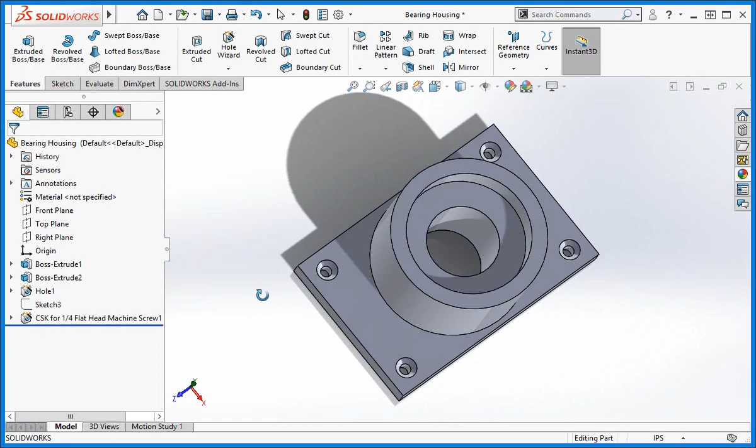Now you're going to create this bearing housing using the skills you've learned so far, and you'll get an introduction to the hole wizard. Start by creating a part file and then create this sketch on the top plane. The rectangle is a center point rectangle, and both the rectangle and the circle are coincident with the origin of the sketch. Also notice that the sketch is fully defined.

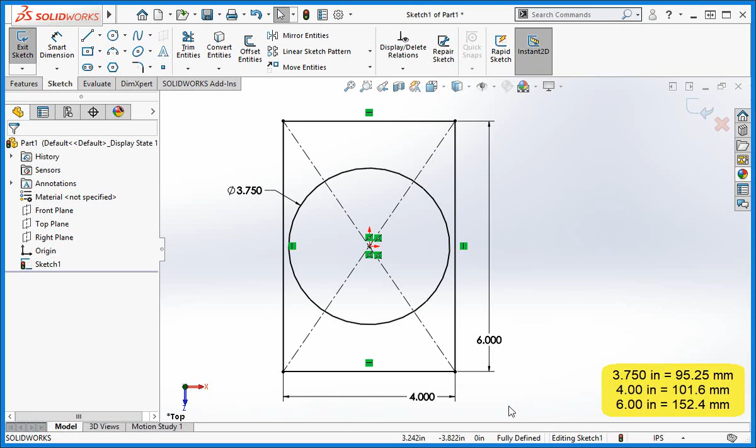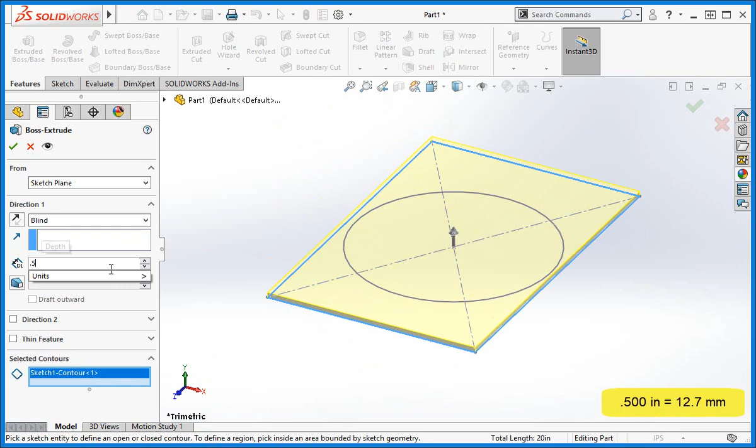Once you've drawn the sketch, exit it, and then open the extrude command. Select just the rectangle, and then set the length of the extrusion to 1/2 inch. Once you've created the extrusion, unhide the sketch.

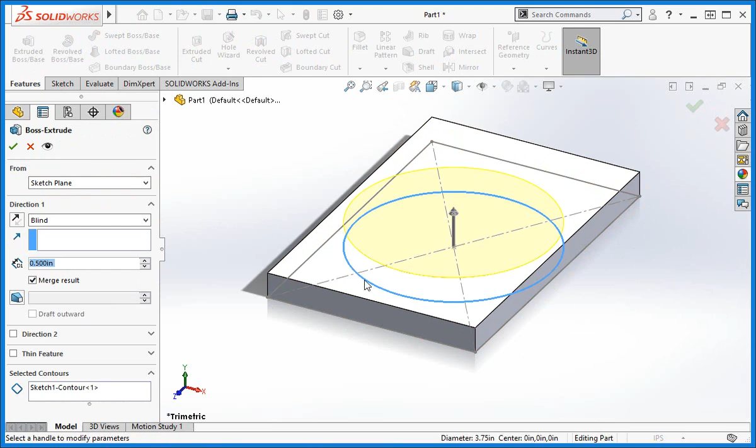Click the extrude command, and then click the circle to select the sketch. Set the length of the extrusion to 3 inches, and then apply the operation. Once you've done that, hide the sketch.

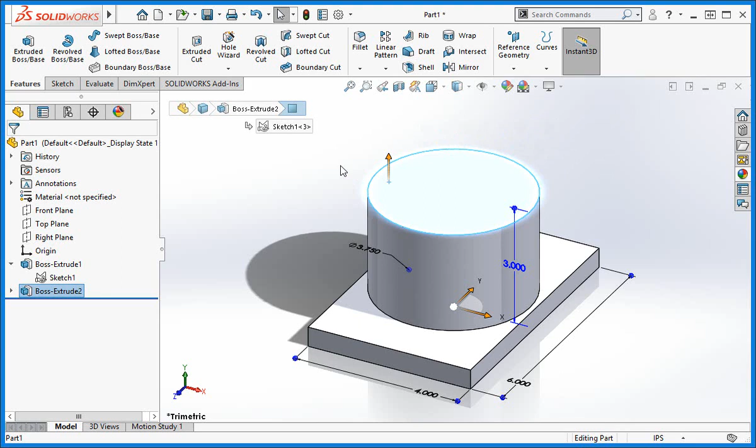Now we're going to use the hole wizard to create the counterbore hole in the center of the part. If you recall, in one of the lessons on the shell command, we selected the top of the bottle before we opened the shell command. When you use the hole wizard, the command will perform differently if you do this. I'll explain why this is the case later in the course. Go ahead and open the hole wizard.

With these options, you can create counterbore, countersink, drilled, drilled and tapped, and pipe threads. These options are designed to fit bolts and screws. This option allows you to create custom holes that don't necessarily fit a bolt or a screw. And the last 3 options create different types of slots. Select the custom option, and then set the type to counterbored and drilled.

If you scroll down, you can see a drawing that describes the parameters of the hole. The diameter is the drilled through hole. Double-click the cell to set this parameter to 1 3/4 inches. The next parameter is the depth of the hole, but since we're going to create a through hole, there's no need to enter a value.

Set the counterbore diameter to 3 inches, and the depth of the counterbore to 3/4 inch. Scroll to the bottom and then select the through all end condition. Now that we've defined the parameters for the hole, we need to specify its location.

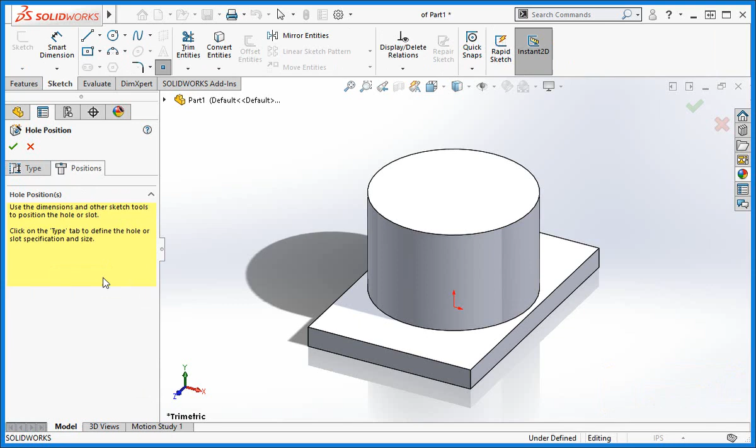Click the Positions tab, click 3D Sketch, and then place your pointer over the circle on the end of the second extrusion. When the center of the circle appears, click it to place the start point of the hole. You can add other start points to the part, but there's no need to do this at this time. Type the Enter key to apply the hole.

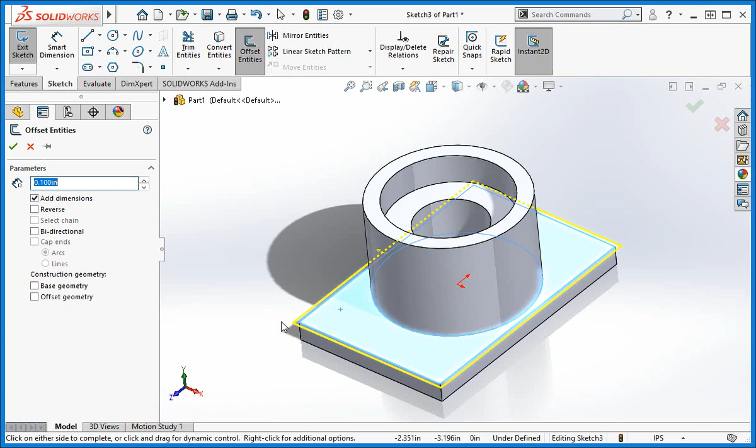Now that we've created the counterbore hole, we're going to create countersink holes for 1/4 flathead screws. We'll create a sketch that controls the location of the holes, and then we'll add the holes. Create a sketch on the top of the rectangular feature. Now click the Offset command, and then select the top surface. This automatically selects the rectangular border of the feature.

Now set the offset to 1/2 inch, and then reverse the direction of the offset. Type the Enter key to apply the operation. Now exit the sketch, and then open the hole wizard. The type of hole is countersink.

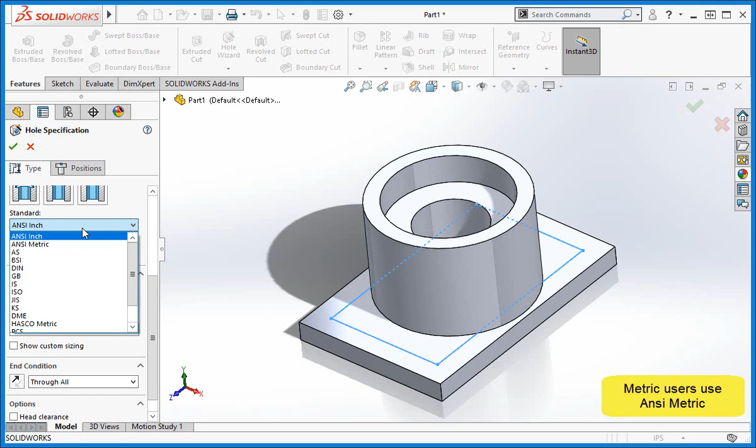We're going to use the ANSI standard and the units are inches, but you can select from a large list of standards. We're also going to create holes for a flathead screw with an 82-degree head. The size is 1/4 inch. And for now we're going to use the normal fit. We'll revisit this option in just a minute. We're also going to set the end condition to through all.

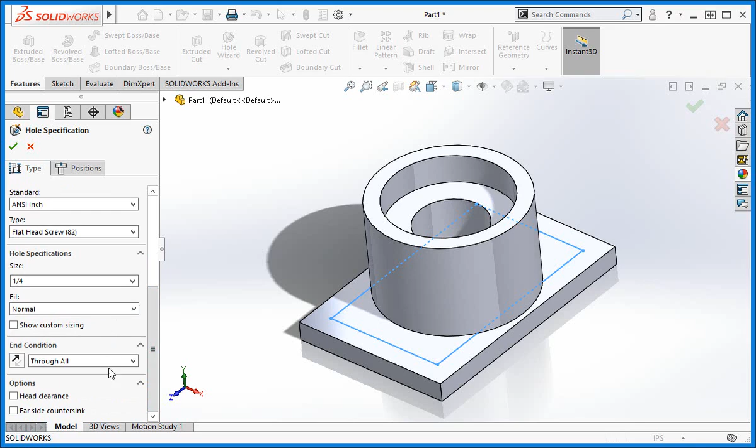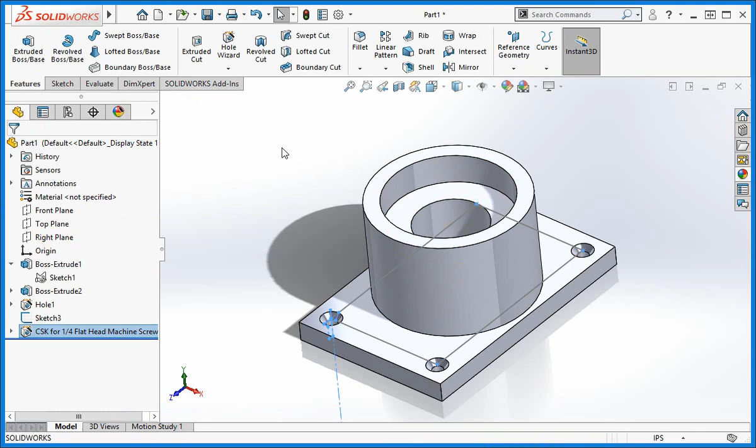Once you've applied these settings, click the Positions tab and then click 3D Sketch. Select the nodes on the corners of the sketch and then type the Enter key to apply the holes. Now that we've added the holes, hide the sketch.

Let's look at the size of the holes. Rotate the view to the other side of the part, zoom into one of the holes, and then open the Measure command. Now click the circle on the end of one of the holes. The diameter of the circle is 266 thousandths of an inch, which is a free fit for a 1/4 inch screw. Type the Escape key, and then edit the holes.

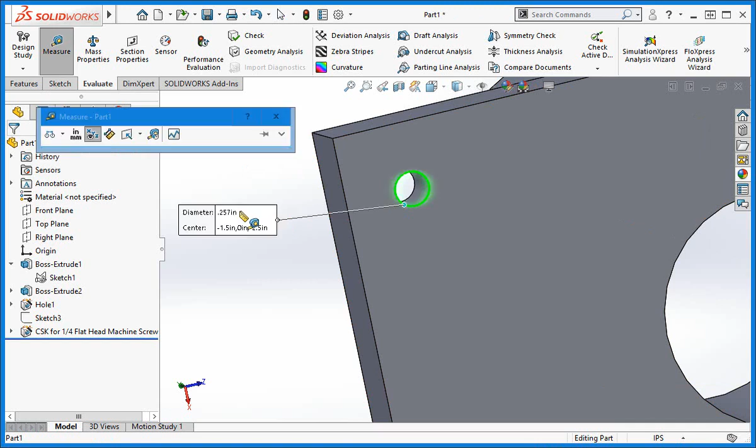Now change the fit to the close fit. And then type the Enter key to apply your changes. Open the Measure command, and then measure the hole. A 257 thousandths of an inch hole is considered to be a close fit. So a close fit is a close fit for a 1/4 inch screw. The normal fit is a free fit, and let's look at the loose fit.

.281 inch is a very loose fit for a 1/4 inch screw. It's nice to know that SolidWorks can apply different fits for holes, but I also recommend that you check the size to confirm that it's the fit you want.

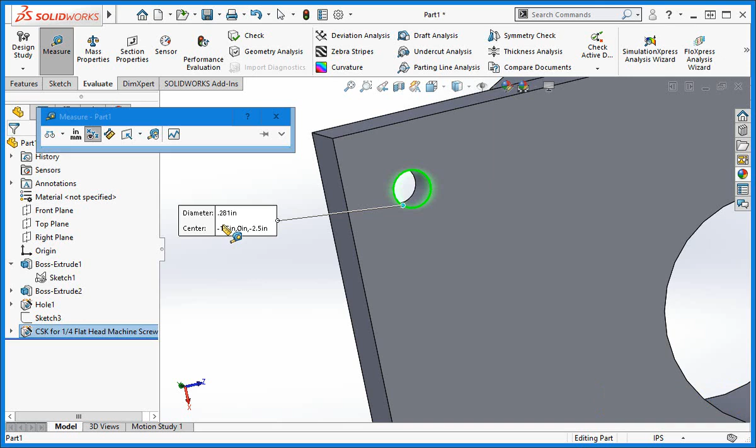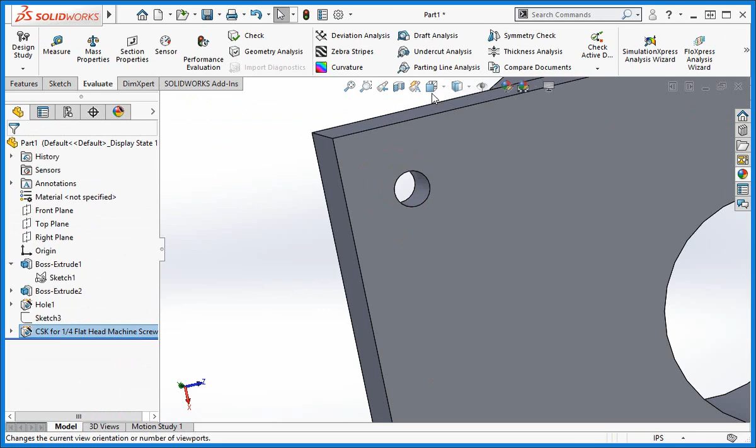Ultimately, you're in charge of the parts you draw and design, so whenever SolidWorks automatically applies a size parameter like this, it's always good practice to measure the feature to confirm that it's the size you want. Set the fit back to normal. And then save the file under the name bearing housing.